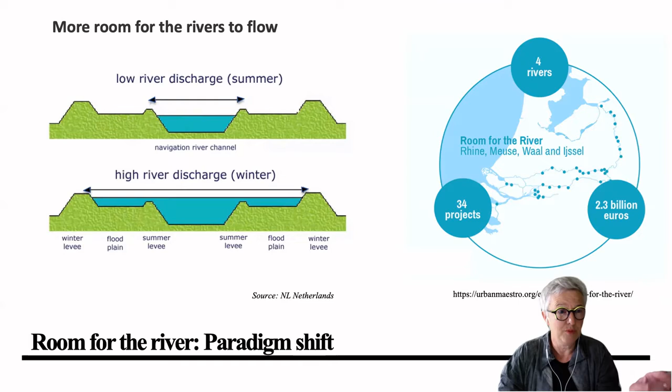Room for the River consisted of 4 rivers, 34 projects, and the costs were 2.3 billion euros, just to give you an idea. The success of Room for the River lies in cohesion and the combination of all kinds of aspects in productive solutions in space with positive impact on nature and on people. In the shortest summary, the project's success is place quality, or in other words, beautiful, sustainable, together, the motto of the New European Bauhaus. The success of Room for the River would never have been as large had quality not been one of the 2 major goals from the very first start of the project. And this is important to realize.

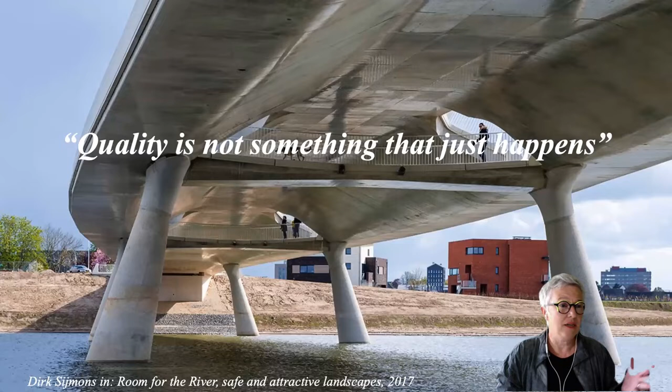And at the same time, what was also important, it was a top-bottom program. So national coordination and local implementation. The equal goals of improving safety and place quality on all scales provided room for negotiation. And now I come to the main message of my story. Setting place quality as a goal, for example, in Interreg projects, is a good start. However, place quality is not going to happen by itself. Besides setting the goal, good quality governance is needed, and the right tool repertoire from the beginning till the end and on every scale. And now I see everybody think, yeah, what is place quality governance?

Well, here the link between the Davos Declaration, the New European Bauhaus, and Interreg is relevant. And in the scheme, you see how following the Davos Declaration, we are all advised to place quality at the center of European development policies and projects, including Interreg projects. Quality as the fundament of the legacy that we leave behind in every program and every project. And to help us follow this advice, the international Davos community published the Baukultur quality system. I don't know if you know it, but it's a very interesting system comprising 8 place quality criteria.

And what we learn from these criteria is that place quality is both substantive and instrumental. It concerns both the characteristics of physical projects and places and the governance. And in our research, we found that it is good place quality governance that defines the success of Room for the River. It offered a coherent framework for stimulating and enhancing the 7 other criteria from this quality system.

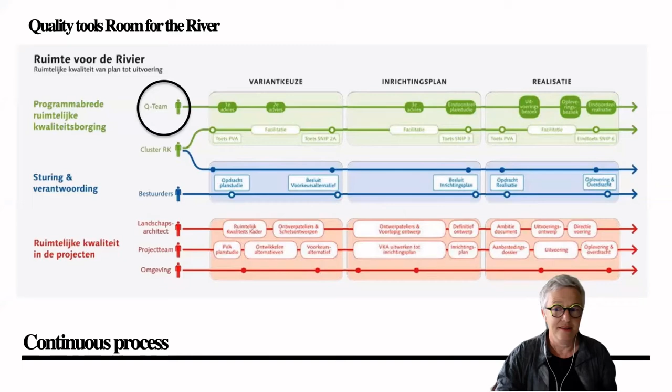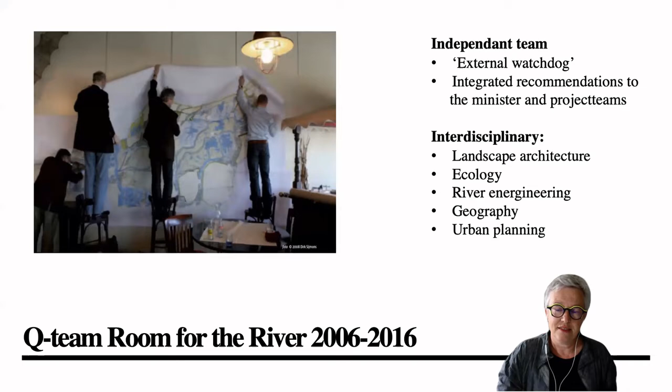He is one of the landscape architects. In our research, we define quality teams as advisory practices of interdisciplinary teams aimed at enhancing place quality as a defined public interest. The quality team of Room for the River was an independent team consisting of 5 disciplines: a river expert, a landscape architect, urban designer, ecologist, and physical geographer. These experts were capable of working together and developing integrated recommendations, focusing on both goals: safety and place quality.

They had a role during the whole process. They were operative on all scales, and deliberately used quality delivery and quality culture tools, for example guides, coaching, peer review, and a final assessment of all 34 projects.

This brings me to the final takeaways of my presentation. I would like to advise every Interreg project to make place quality a co-objective, to organize quality governance, and to choose the right tool repertoire, which is a mix of quality delivery and quality culture tools, during the whole process of a program or project and on all scales. These are challenges which I hope will turn out to be success factors in all the projects you will be working on. Thank you.

Thanks a lot, Sandra, that was really inspiring. I would like to immediately pass on to Peter. We can see it still. Okay, yes, great, full screen, all good.

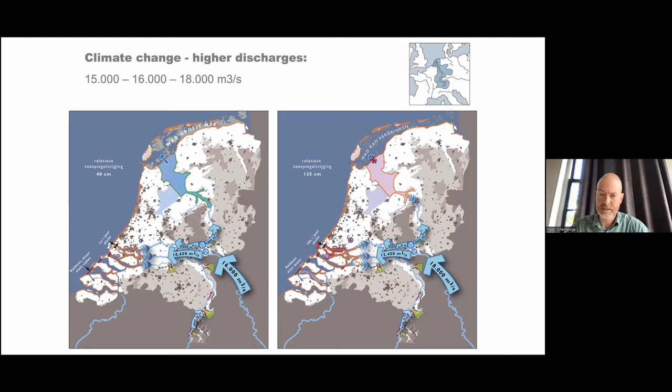The challenge is that the discharge is increasing. It doesn't happen so often, of course—we count with a situation that happens one time every 1,000 or 1,250 years. But the amount of water that needs to pass our country, entering from Germany, is huge. It was 15,000 cubic meters per second. Room for the River made the river region safe to deal with 16,000 cubic meters per second, and it will be even 18,000 in the far future. So the challenge is big to make room for that.

At the same time, during the last century or two centuries, the natural room for the river actually became smaller, especially because of urban development.

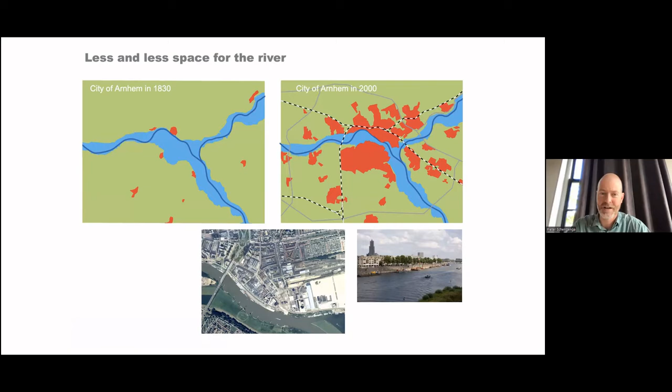Dikes were realigned in order to make space for cities to grow, and the result is some urban bottlenecks, places where the water has difficulty passing and causing higher water levels upstream. As a third thing, Dutch rivers are not in the middle of a valley like most rivers in Europe, but they are surrounded by high dikes and low-lying polder areas.

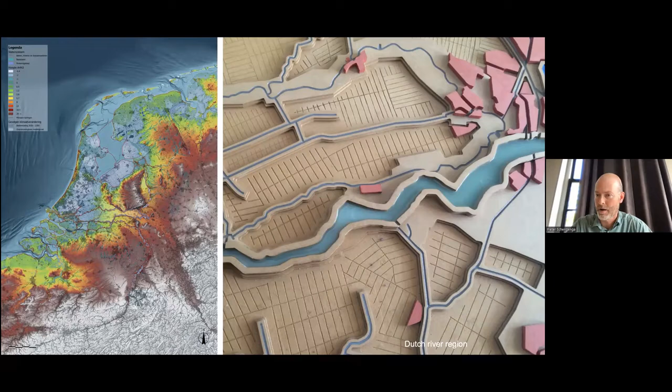So you could see immediately on this model why it's so important that the river area is safe and that the water is kept between those dikes, because in case of a dike breach, the floods will actually stretch over a large part of our country. Now, a typical cross-section of the rivers shows the part that's always wet. We call that the summer bed, which is also suitable for shipping. There are groins, built to prevent sedimentation in the summer bed in case of low discharges.

It needs to be kept as deep as possible. Then there's a floodplain, bordered by a dike, high enough and safe enough, maintained by the water boards. The floodplains used to be mainly agricultural. Around 20 or 25 years ago, there was a big change, the idea that you can also develop nature, and that these were not the best places for agriculture in the far future. So spot by spot, the river region is being transformed into an area with new nature.

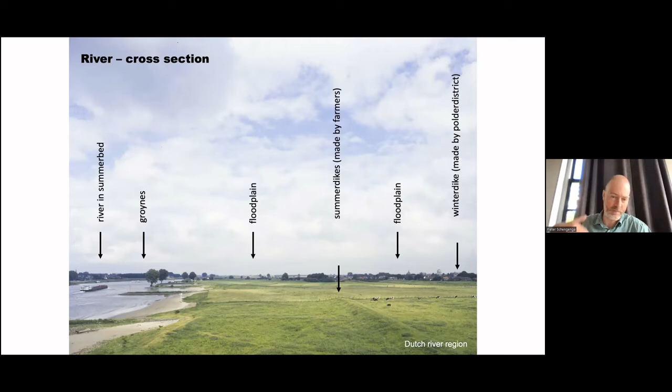That was a big shift, and it was already going on when the Room for the River program started. So there was already a coalition between high water safety and nature, and that was actually very important to develop the Room for the River ideas.

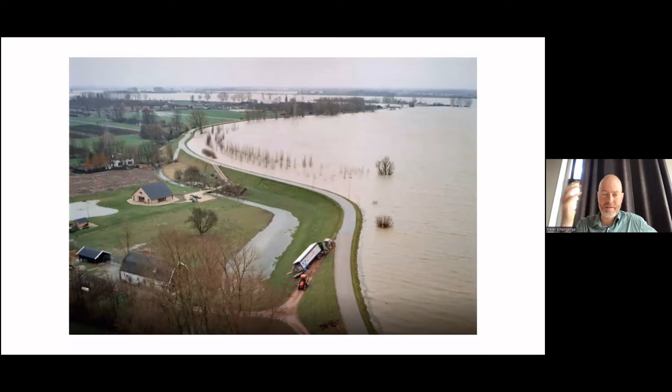Sandra just told about the floods or the high waters in the 90s. This is one picture, and every time I look at this picture, I feel the danger of the water and also the importance of this dike. Strengthening of dikes is something that's been done for ages already, centuries. And we as an office were also involved in this, and of course in the Netherlands, we know how to do it.

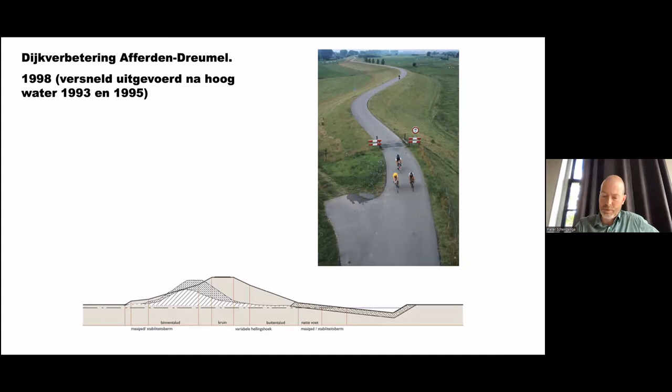But it's still needed. Raising dikes every time you need to deal with higher water levels, that was not the way to go. Room for the River is a shift in this. The idea is, instead of taking those high water levels for granted and raising your dike, you could also say, well, we would like to lower the water levels. How can you lower the water levels? You can lower it by providing more room for the river again.

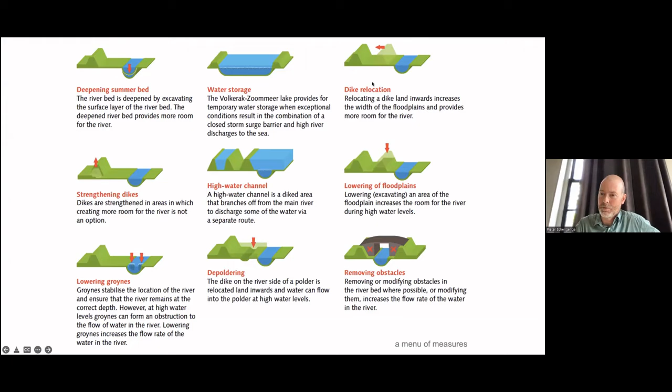And there are many ways to do it. The summer bed can be deepened, that's one thing, but it might be better to introduce high water channels, to depolder or naturalize agriculture areas, remove obstacles, lower floodplains, but also often the case in Room for the River projects, relocate the dikes again — take back the room that was taken from the river before.

In the beginning of the program, we were involved in the strategic planning, and we came with three different concepts for how to give the rivers more room again. The concepts are: a wide river, so relocations along the dikes evenly spread over the country; and old and new, introducing big new rivers right in the middle of the agriculture areas, actually designing more river branches in the Netherlands.

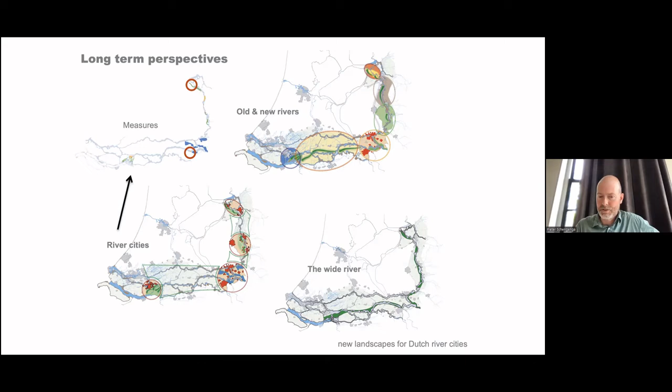And the third one was called river cities — maybe the spots that seemed not to be the easiest, but maybe the most interesting for these big projects, because you could also give more quality to the environment of the cities. The measures that were chosen are a bit of a mix between different models, but there are also lots of big projects in the surrounding of the big cities, the river cities. Here's an overview of all the projects spread over the country.

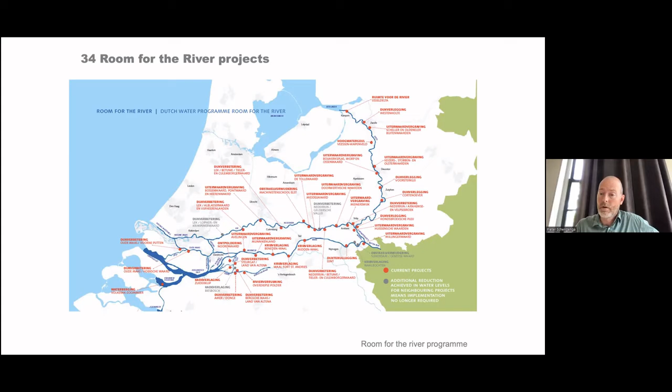What's interesting is that, of course, it's a national program, but it was mostly local authorities, municipalities or provinces, responsible for the selection but mainly for the design of the measures. So also was the city, the municipality of Nijmegen. And for them, it was a big shift in thinking.

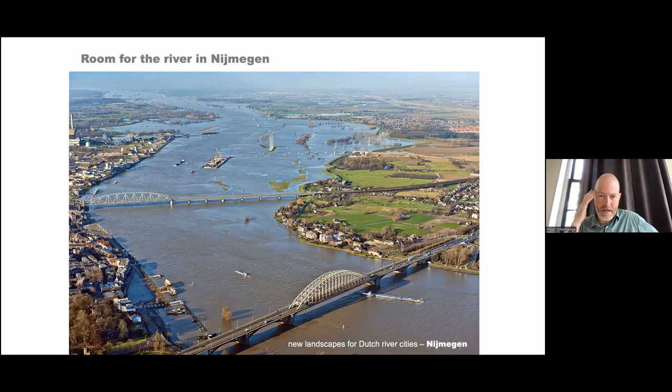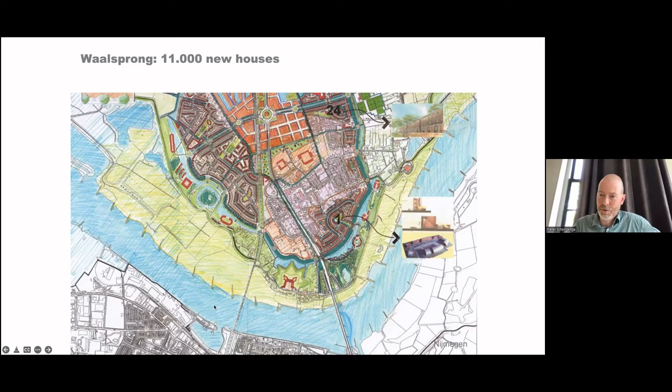This was a hotspot in the Room for the River program, really needed to do something here. So step by step, the municipality started to rethink their orientation to the river. They thought, instead of a threat, this could be an opportunity, to also orientate the new and old city in another way to the river area. You can see step by step how their way of thinking shifted completely. Instead of a city with only one bridge connecting the two banks, now it became a city with many bridges, not one river but several river courses, and lots of interaction between the water, the city, and the nature and surroundings.

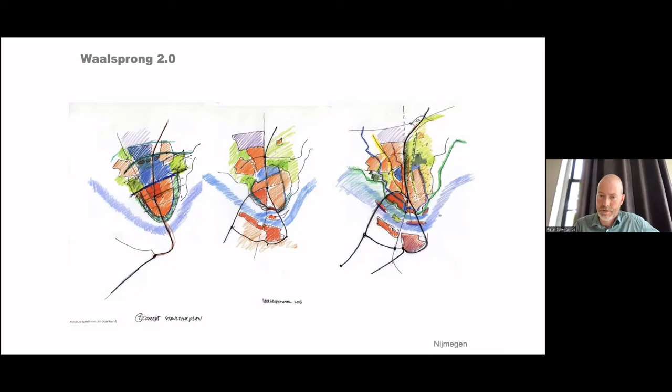Here you can see in this scheme what happened. The gray line is the old dike. The dike is realigned to the north. Part of the old dike is now integrated into a new island in the river, and a new river branch is located over here. Lots of new bridges are constructed as connections between the island and the realigned dike. In this scheme you can see the overview.

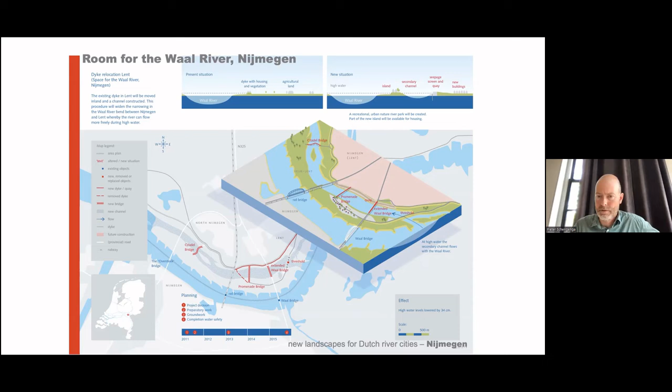The effect is a lowering of the water level of around 34 centimeters, and that's actually a lot compared to other river projects. On a concept level, it's the connection between the two sides of the city, old and new, and also the connection of the river and the natural river environment in the heart of the new city.

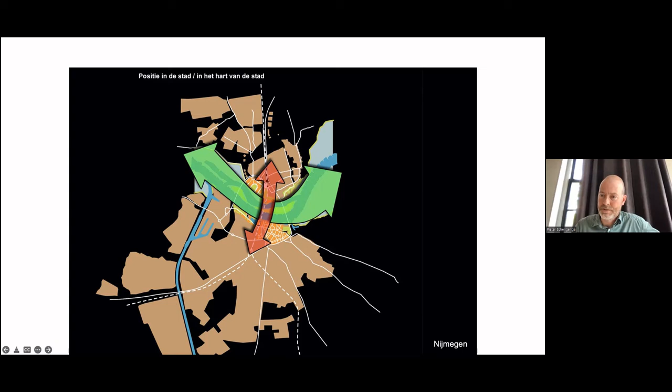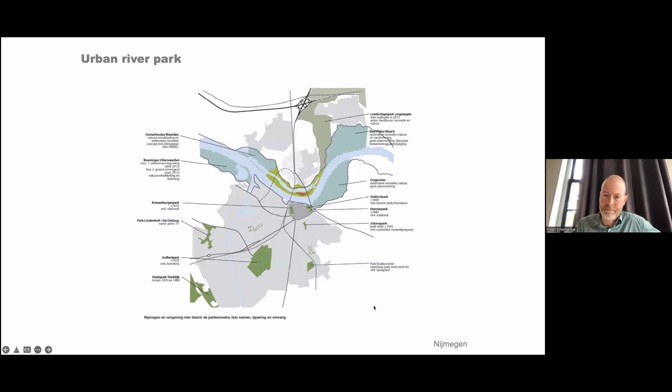Then we started thinking - there's already a lot of parks in Nijmegen, and every park is an expression of the time in which it was designed. So what would be the design of the park area in the middle? We call it the urban river park, so that's the concept for this area. This design has several layers: the existing situation at the bottom, and the design and construction in the middle.

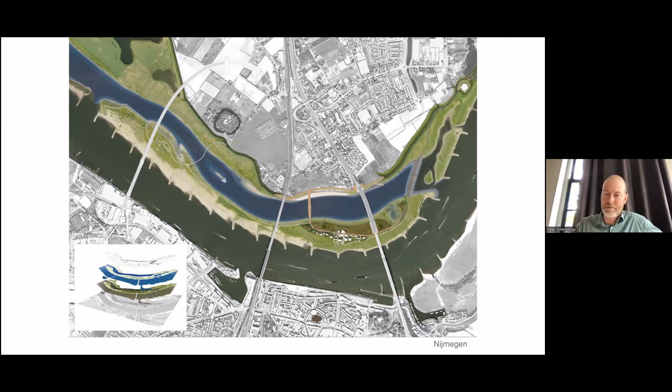This layer stands for the water calendar - the water levels moving through the seasons. And the last one is the way the landscape and natural development can take over a bit; it also starts to change. Vegetation grows, erosion can happen, sedimentation can happen, and all these things. So it's not completely fixed.

An overview from the west to the east. The western part is quite natural. It can also be used as an event area, accessible with this new bridge.

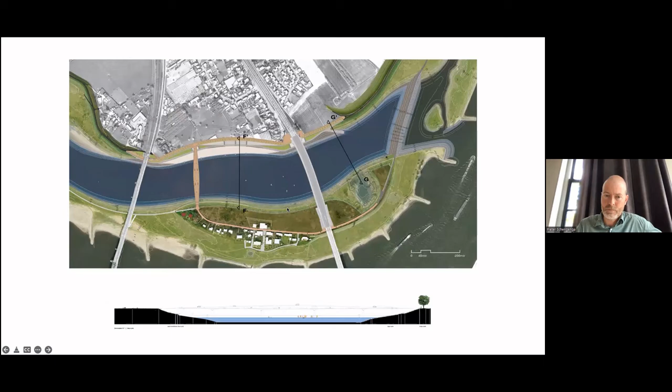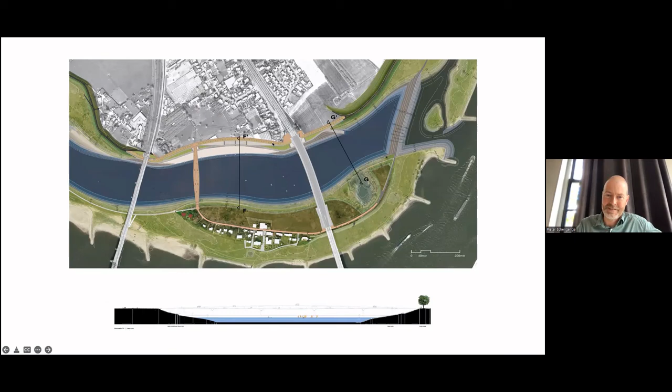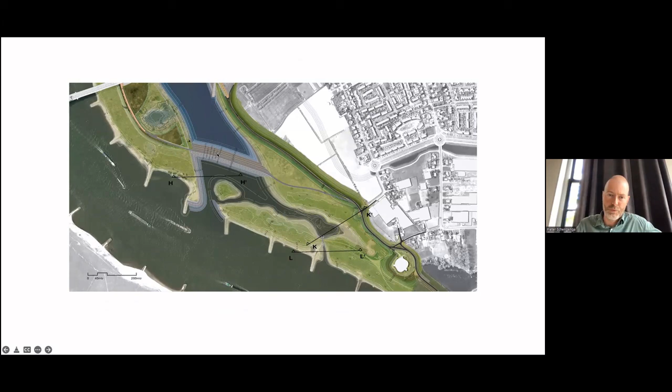This is the central island area. There are some houses here already, but these were houses that were already there because they were lying along the old dike, with space for further development. A new quay on the north side, and also a bridge that connects to the island. On the east side, an inlet that's high enough to keep the water out when necessary, and when the water in the river is higher, this threshold overtops and the new gully starts to stream.

Very important for recreation, and already very well used after it was opened, but not so heavily programmed. What you can do and where you can do it is actually organized mainly by the water levels. That's very interesting, and that's the big difference between existing parks and this natural environment.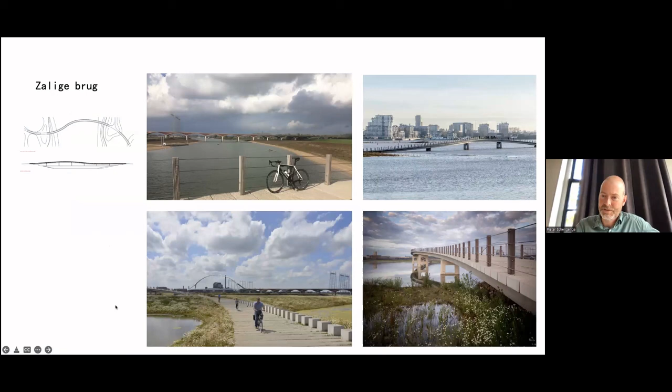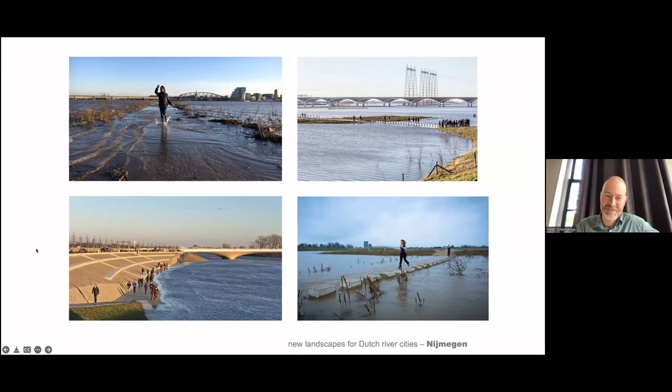What's interesting is that part of it can also flood, and if it starts to flood you can reach the other side by making use of these stepping stones. It was discovered immediately and used - the first time during the first high waters, people were queuing to use these stepping stones. So it was liked a lot by the inhabitants.

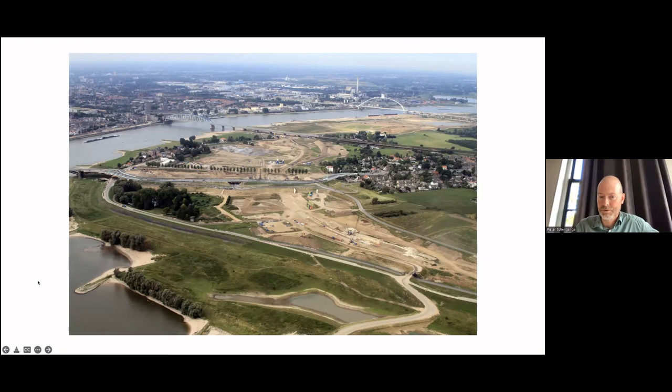It was a big work, lots of digging - of course you can see it. It looks very natural now, but it has been a lot of work to construct. An overview of how it's realized just before the trestle starts to overtop.

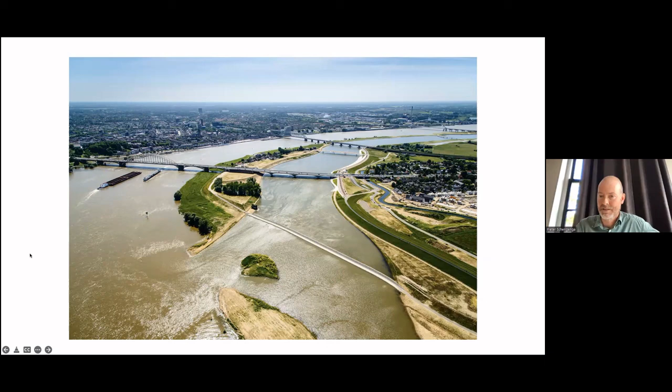This is relatively high water, and you can see here on this image. So far.